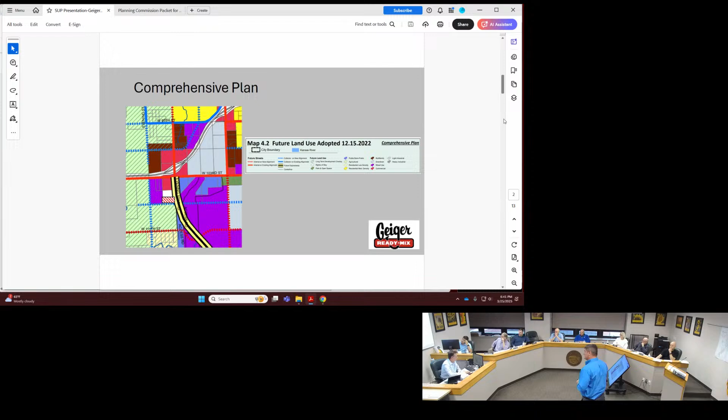I think we've already covered where this site's at and how it fits with the comprehensive plan now that we have our zoning in place. Again, this is the site and the comprehensive plan around it, but I think staff has covered where we're at with that to date, so I won't belabor that anymore.

So here's our latest site plan, very similar to what we presented last month. We've added a couple elements: a fueling area here, a small washout area here, but generally trucks are still coming in off North Drive entrance off Evening Star into the plant, loading completely covered inside the plant itself through overhead doors, leaving the plant here to the slump station. They test the slump of the concrete, quality control procedures for every load, and then a little washout area here, and then the truck leaves the site for delivery. So everything's still very similar to what we presented last month.

Here's the recycle, the washout area for the trucks where they recycle the water. Still our detention area—this is still open, preserved area with this vegetation not being disturbed. The landscape plan's been updated to address some of the buffering requirements on the north.

This calls out extending that ornamental fence 200 feet back on both sides. Working with the developer of the property, the section to date showed an 80-foot right-of-way for Evening Star for the half road improvements. So we adjusted that landscaping plan, because we initially last month showed a 60-foot right-of-way. We pulled that back to match the proposed section that the developer's engineers are working with city staff on. But we have room on site to move that where it needs to be if that's the recommendation, to set that right-of-way aside now before we move through the platting process.

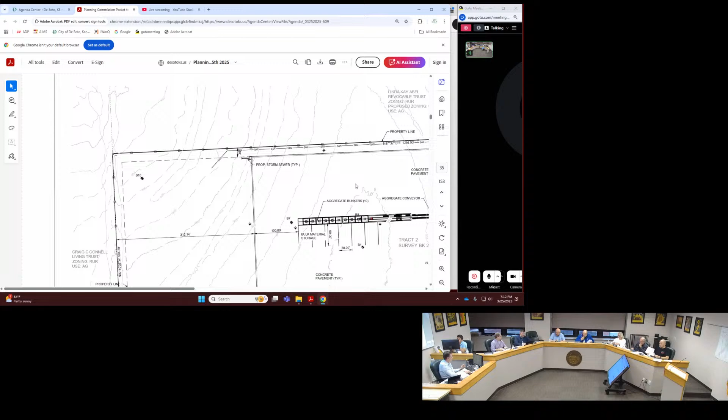Brad, I didn't see a photometric or lighting plan on this. Do we need that for the special use permit? It's in there, there is. I missed it, where is it? About halfway through, yeah, you can't read the numbers. Let's see, it's sheet EP 1.00. I'm sorry, what was that? Say that again. EP 1.00.

A couple more, Mike. Yeah, this thing takes a little bit to load. Yeah, I have no idea what this is. So, yeah, these are the numbers. Can you zoom in? It's supposed to say zero at the property lines. Lots of zeros. But yeah, on your printed version there's no hope of reading those. But you can if you zoom into the PDF.

So the idea is, unlike the construction we have right now at Astra that creates a lovely glow, this should basically be designed to keep the light within the property line. Correct. Now, there will be some sky glow, there's no avoiding that, but. These photometric plans generally test at the ground level, the lighting conditions at the ground level, not in the air. So these zeros don't represent the sky glow, but that's what our regs regulate to.

Those lights that ring the batch plant 90 feet high, is that where those lights are? I believe there's, I don't, no, Brad, where are the lights? There's nothing on poles, there's some pole lights, correct? Correct, they'd be no more than 30 feet high, no different than a traffic light pole.

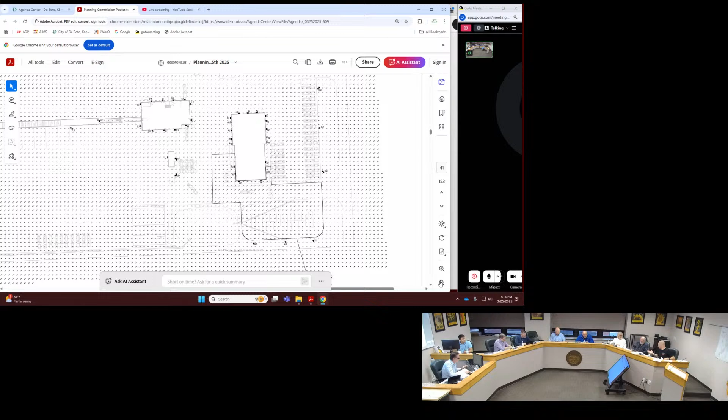Well, I suppose my only question is, does this comport with what we require? Yes. Thank you.

I do appreciate the addition of the vegetation on the north edge of the property, because driving down Evening Star, it'll be very visible, and having something that will help shelter that's helpful. So I appreciate you doing that.

Other comments? Yeah, so, I mean, first off, I want to thank staff for doing their hard work, going around looking at all the other batch plants and working with the applicant on adding the updates to the elevations.

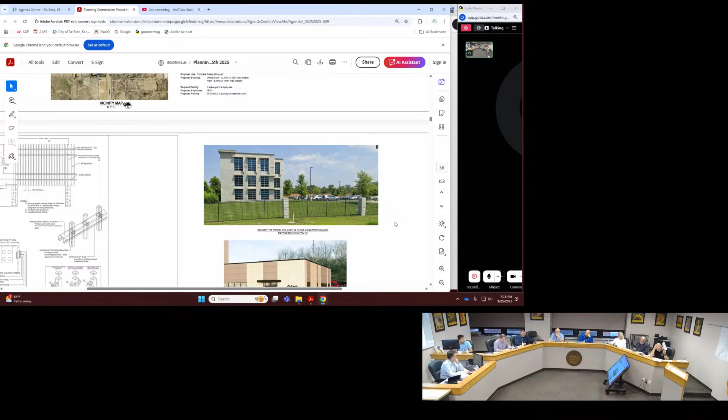Ultimately the maintenance building, I think it looks great. The batch plant building, I mean, it's 90 foot tall, I mean, what it is. But it's quieter being 90 foot tall because everything's inside. So, I mean, they're doing their best, I think, to mitigate the noise, and with the lighting plan, it shows doing their best to try and mitigate the light disturbance.

But I do think there needs to be a check-in period at 10 years. I'm still in support of the 20-year term.

The timing, I'm kind of torn on that. 2 o'clock in the morning is pretty early. But it'll just be employees coming in, I understand that. I don't think trucks would need to be leaving at 3 o'clock in the morning. That seems fairly early in my opinion. I would like to hear what everybody else has to say about the timing, but generally I'd be in support. I'd like to hear what everybody has to say on the timing, that would be my big concern.

I agree with the 10-year term with a look back or a check at that 10-year period, and administrative approval being possible to go to 20.

And I think the hours outlined by staff are reasonable, and I know that they're not always going to cover the needs. I guess I would like to see us use the hours outlined by staff, with staff's ability to extend that period when requests are made. And if staff feels like they need 48 hours to respond to a request, go with it. I'm not a big fan of making a bureaucratic headache for anybody, but by that same token...

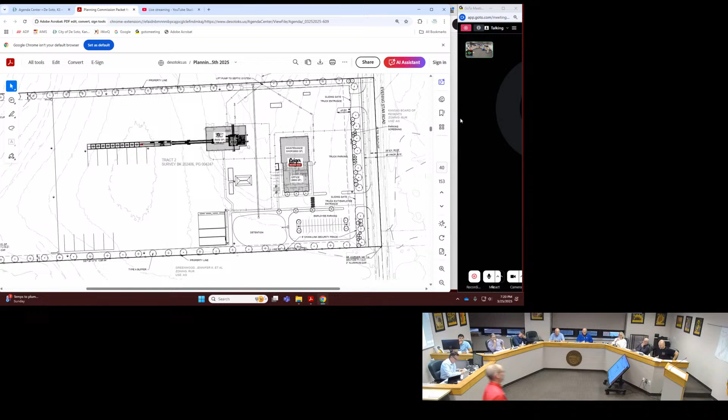We don't want early morning pours either. Midnight was pretty typical and common before COVID, and work-life balance with individuals changed that. 4 a.m. is really our start.

With your comment of consistency and then your comment of what staff recommend, I would ask, can staff recommend a different time, or how would we address that? The city of DeSoto already granted the property on 83rd Street 2 a.m., so I know it's going to be an issue or a challenge at times. I just don't have consistency. And if it's an extra step for us to call in, we can do that. I'm just trying to avoid it on the time frame.

I appreciate that. To address the question of consistency, the other plant had a variety of other issues, in particular the traffic on 83rd Street. That was a very different situation than what you're dealing with, having good highway access from where you are and being able to get out.

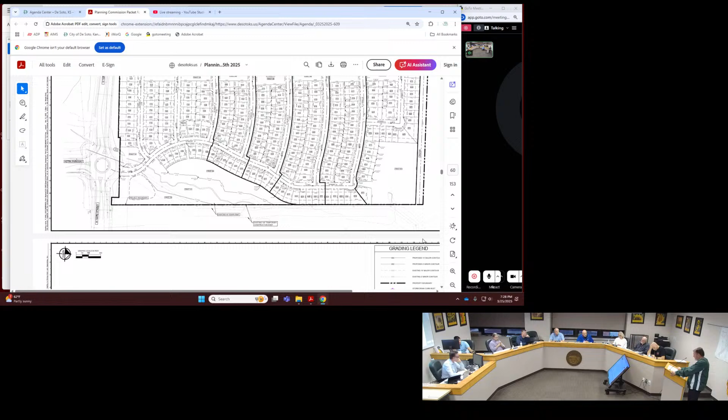The applicant has indicated a preference for the layout before you tonight. Staff would like to see a different route. The other part is the collector status of Astra Parkway north of the traffic circle - at the very least, staff believes it should be wider towards the roundabout, similar to what happened out at Arbor Ridge, tapering off as it goes farther into the subdivision. The other issue is Rowan Road.

Typically, the property owners will dedicate the right-of-way. Those issues have not been resolved, so we wanted to bring that up, but we still felt it was appropriate to bring this before you, just showing the two things we're still trying to work out. I think they can be worked out, but we need to get these things before the planning commission to get some direction and recommendation. We are asking you to table this and bring it back.

This is a very significant development for the city of DeSoto. Those are the two things: Rowan Road and how to handle the additional right-of-way, and the status of Astra Parkway primarily north of the roundabout for the first few hundred feet, and potentially connecting into 99th Street. I know the applicant, Flint Development, would also like to address the planning commission on why they chose this route instead of connecting to 99th Street. I think it'd be beneficial for you all to hear that as well.

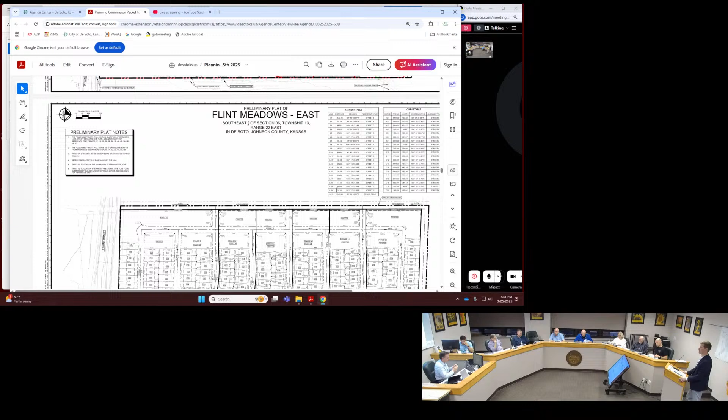While he's pulling that up, basically we met with Confluence and HDR, and their recommendation was that Rowan Road is the better street to have as a collector, just because it divides that quadrant. It's evenly placed east and west between Sunflower and Edgerton, and 99th would be evenly placed between 103rd and 95th. That divides the quadrant up, and if there's further development in this area, I know there's some rural residential homes to the north of us that could be 20 years before they decide to change and develop that.

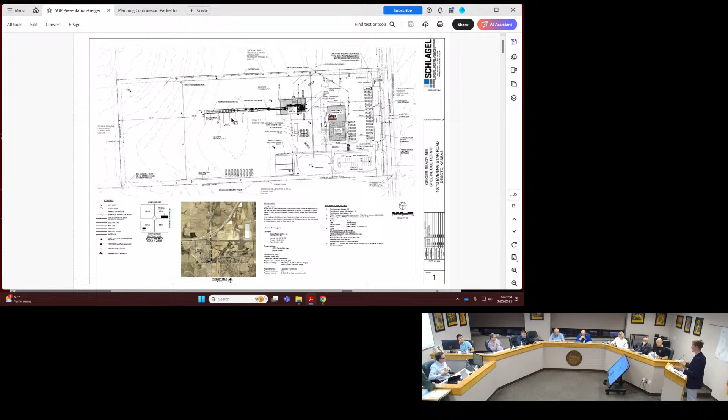So that could be a very long time. Our neighbor to the west, same thing, they're currently farming, and we're not sure when they plan to develop. So looking forward to the future, that road would serve this development, and any of these others that choose to develop, especially because Rowan Road currently cuts about halfway through those northern parcels. So with this road connecting to the northern boundary, I don't know if I have a pointer I can use to help.

Do we have a laser pointer? Doesn't work. You have one? There we go.

So here's our site. Rowan Road currently extends to right here. If we extend Rowan Road right there, you're 1,000 feet left from creating this connection. So rather than taking this as the collector street down our eastern boundary to 99th Street, which may or may not get developed for many years, that kind of serves as a dead-end route. So to us, and to Confluence and HDR, that seemed less likely as far as being a public improvement that will benefit this area long term.

So those are a couple items. As far as the connection through our development, Panasonic's significant development means lots of truck traffic, lots of vehicle traffic. That is going to be the main entrance to this intersection. And if any of us were to live in that neighborhood, having your kids playing basketball in that street, and having cars accidentally taking that roundabout north with truck traffic going through, that would be a real concern. So just from the aspect of creating a safe space in that neighborhood, Rowan Road provides access to the neighborhood.

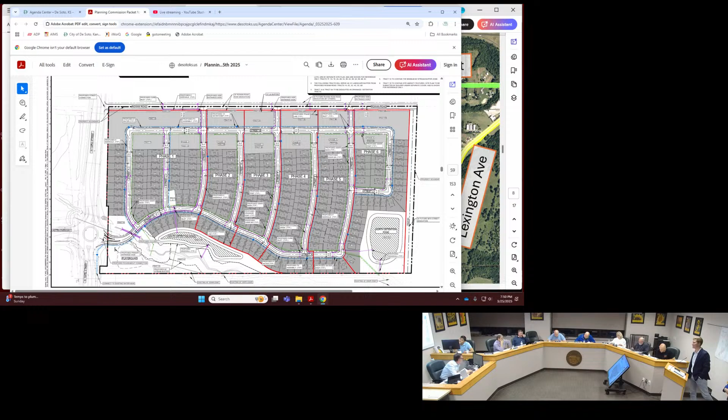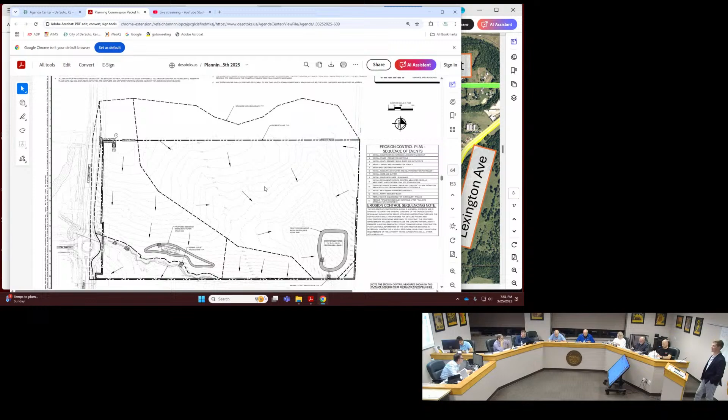Maybe this is an old picture, but the color site plan that I'm looking at. Okay, which one are you looking at? Oh, that one may be older. Yes, after staff's recommendation, it made more sense to group the townhomes along that collector street, as well as that side of our development, just for consistency of the community. Okay, I'm looking at the wrong one. Not the first time. Scratch that.

Mark makes a good point, that there's going to be traffic that's going to go through there for somebody who's trying to cut through some way or another, and it's going to happen. The question is how much. I think the idea behind what you're proposing is that you would discourage that by not improving it to the point that it looks like a cut-through. Yep, I get it.

My take on it is I wish you well with city staff, and I hope you guys come up with a way to work it out, seriously. Well, just another point to add, for what it's worth, originally we had very straight roads, kind of like you see more in the area of town where I live. Staff did recommend to curve all of these roads so you get nice curves there. That does kind of deter it, especially the circuitous nature of Street A there as well. So we think we've covered that pretty well, at least for the benefit of our community.

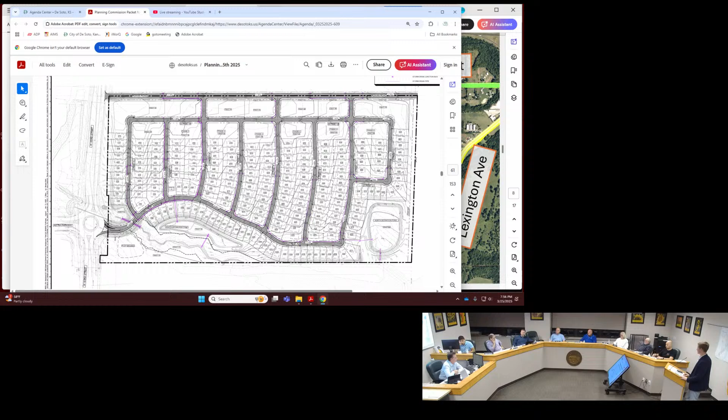Right, okay. Well, thank you for humoring staff with that. We didn't want to call it a fight. No, I appreciate it, and seriously, I don't mean to discourage you from bringing these things to planning commission, I think it's fine. I also don't want to get in a condition where it seems like I'm telling you to just go take it to planning commission. That was certainly not the tenor of the discussion. I want you to be empowered to do these things.

Okay, so could we have a motion to table? There's some public notice to this, so could you make a motion to table this until the April meeting? I make a motion that we table this until the April meeting. Second. Moved and seconded, any further discussion?

Roll call. Schultz, yes. Meadow, yes. Milburn, yes. Martin, yes. Templin, yes. Lane, yes. Huggins, yes. Motion carries to table. Thank you.

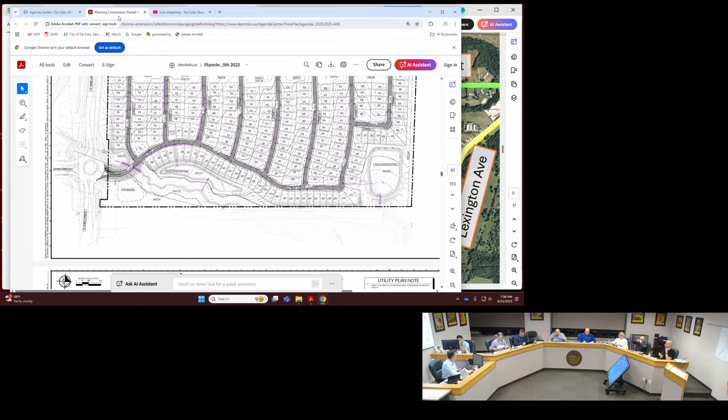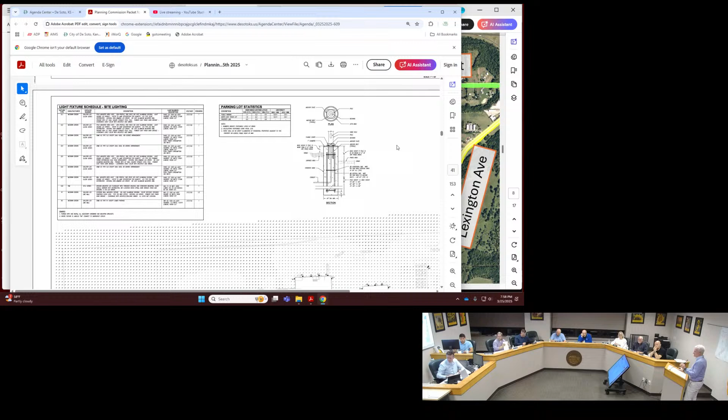Okay, new item 7B. I can just briefly address this as I put in the email. Part of the public hearing process for this RHID, for the project you were just looking at, is the planning commission needs to be sent a copy of the resolution passed by the city council scheduling the public hearing for April 17th. I just wanted to give you guys an opportunity if you had any comment or feedback you'd want considered at the public hearing. There's no official action to be taken.

Essentially the RHID is similar to a tax increment financing, where the applicant gets back a portion of the property taxes for making improvements, installing public improvements in the development. So statutorily this is relatively new, right? Yes, and the statute requires you to provide a certification to the planning commission of this hearing, I guess, the resolution. So we've fulfilled the statutory requirements by presenting it tonight.

In addition, I guess you're suggesting we can make some comments on the record that may be shared at the public hearing. If anyone so desires, I'm not saying you need to. I'll give you an earful if you want it, but only if it's relevant. My comments are not as a planning commissioner, they're just as a citizen.

I am distressed with the possibility that the development plan as described really has no timeframes, has very little teeth to it. From working with the housing group early on, my position was if we want to push development and get these things done, we need to put some timeframes on these things. To the extent that this is an open-ended approval, those kinds of things would trouble me. But the resolution itself doesn't say that. I'm sure the devil's in the details.

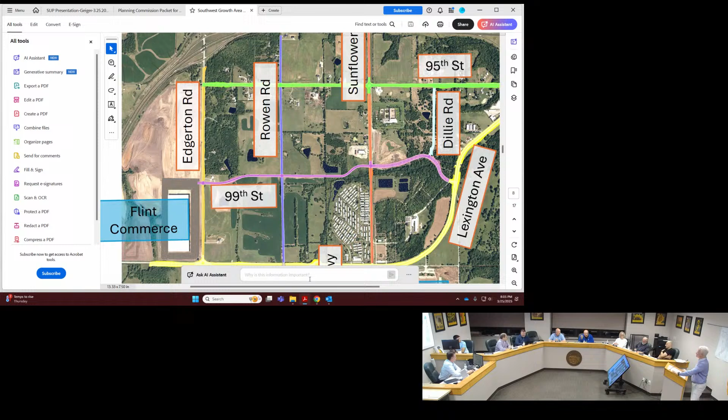Thank you. So Patrick, in the future, I guess we'll just put these on as a notice issue? Get it in the packet, so if there are comments after review, that's fine, just include it in the packet. I think the idea was to spread wide notice, so anybody who might have an interest would know about it. So now everyone's aware this is before the city council April 17th. If this does not pass on April 17th, are they coming back with the preliminary plat? We'll find out, don't know.